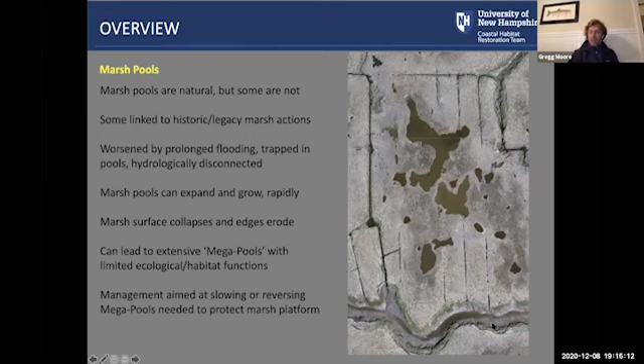This can worsen over time, and pools, particularly ones that are associated with anthropogenic or man-made impacts on the marsh, tend to increase dramatically. And I have some footage of that for you guys. So as the marsh system begins to collapse, erosion becomes more prevalent, the pools deepen, and the problem kind of accelerates, and smaller pools merge into what's called a mega pool, which is really just a series of large pools that coalesce over time. And we're seeing that more and more frequently. So management actions that are aimed at slowing or reversing mega pool formation are really needed in today's situation of sea level rise.

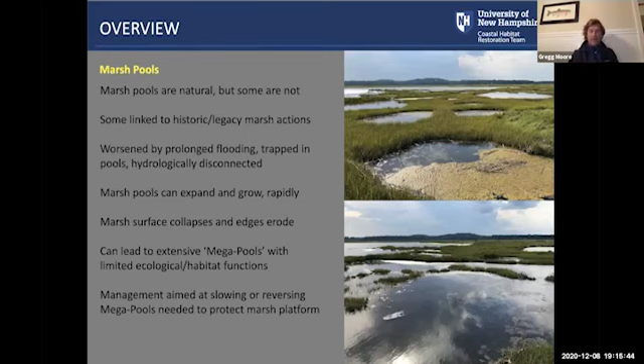And is this lagging? I hope not, because it's video. Is it all right? It's a little choppy, but it's okay.

So runnels are not new, although it seems to be back in the common parlance, but this is an active practice of mosquito control. The shape and length and how they're constructed differ widely, but all of them have similar goals. Let's reduce or reverse pool enlargement, improve tidal exchange, improve water quality in the pools, reconnect hydrology, increase habitat heterogeneity, really just make the system better, but really slow the expansion of the pools. And ultimately, you put all those together and you're building marsh resilience, which is critical these days.

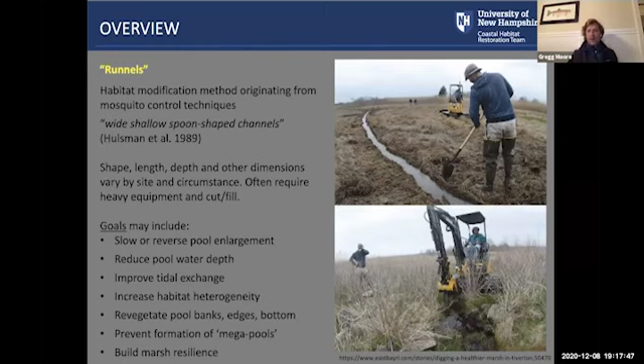The current runnels will be shallower but wider. So they'll have a shallower profile but a wider cross-sectional area. They'll be 8 to 20 inches wide, no more than 4 to 6 inches deep. And you'll see from our selection of the sites that they will not exceed 10 feet in linear length. This is not an approach suitable for every pool management scenario, but it is a technique that was designed specifically for pools that had nearby connections that we could achieve management goals, particularly in places that are remote and where mobilization, demobilization of heavy equipment is difficult or would cause unnecessary alteration or damage. Again, there's no cut, there's no fill.

This is compaction. We joke that if we had a class of fifth graders come through on an educational field trip, they might create a runnel just by their feet walking to the site. So the level of impact is minimal. And because we're selecting areas very close to tidal creeks that are already impacted by some form of marsh collapse, they compress very easily.

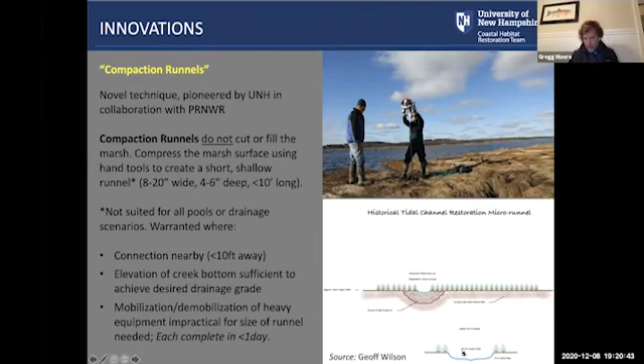I apologize for how small the figure is, but the dimensions there are showing 8 to 20 inches in width and 4 to 6 inches in depth. All right, so this is 30 seconds of a candidate site for one of our runnels that are proposed. There's Dave Burdick, who was about to install a water level recorder that day. This was earlier in the summer while we were checking hydrology and doing RTK elevation surveys.

All right, so the benefits of compaction runnels particularly is that it minimizes the impact to the marsh. It does not result in destabilization of the edges. We like them particularly because they don't result in sediment loss from the pool. We want to make this as gradual as possible so that you don't have erosion scouring from the pool itself.

The design of this will be spec'd for no less than 80% of drainage during an ebb tide. So there's going to be a serious amount of exchange created, which is central to the goal. And it's well suited for adaptive management because it's so low impact and low key. It can be widened if the goals have not been met.

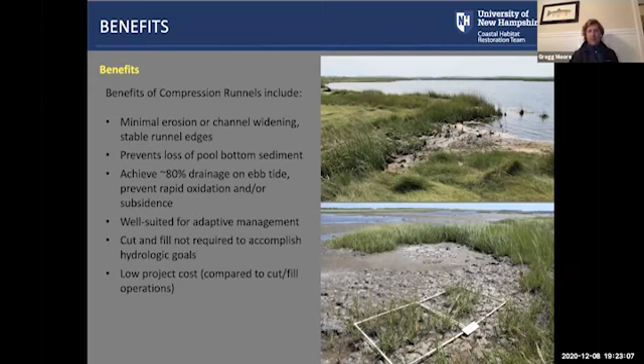It doesn't require cut or fill to accomplish, and it's very much minimizing the costs of the equipment and mobilization that typical runnel projects involve. It's just another beast entirely. And I am well aware of the other runnel project being proposed, and it's going to be a fantastic project with lots of great innovations in it. But these are very different in their scope and their methodologies.

So what have we done to date? Over the last year and a half, we've met with our project team on site when we could all get together and be together in the field. Luckily, we got that sorted out. We've had a number of field site visits to winnow down our list of possible pools to the ones that are the simplest and the shortest run and the ones that we're most confident of success.

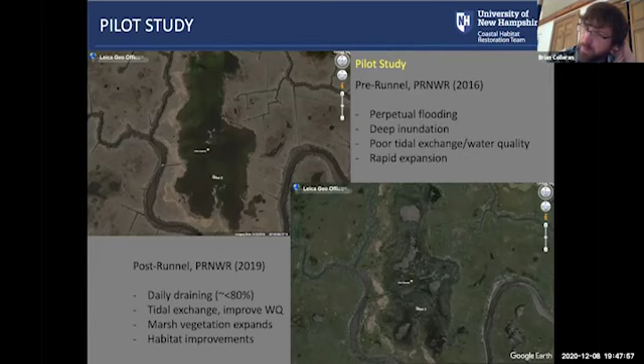If I went back a slide or two, this slide right here. Right, Greg, you're okay? I'm following you. My concern has more to do with the lifespan of the runnel. Because if you succeed with the pool, then at a certain point, the pool is going to be at grade or taller than your runnel, and so then your runnel just becomes like a slope. Now I understand. Yeah.

And to that, right at the leading edge of the runnel of the pool, and just out on the downspout of it, if you will, there tends to be a scour from the force of water coming in and out of that bottleneck. So that's what keeps that open. But yes, in a perfect world that I don't think we'll achieve in 3 to 5 or 10 years, that pool could accumulate sediment and build its way up.

But based on the rates of sediment accretion in the marsh, that's the long haul. In the time frame that we're talking, you won't see that pool heal itself vertically, but you may see it heal itself laterally, as in closing in and becoming smaller in its total area.

Okay. I promise I'm getting near the end of the questions. Well, I'm happy to answer them all.

The pilot project and the natural blowouts that you referred to, with the changing climate as a background and the changing water level as a background, why do you need a control? Arguably a control is for replication, so that people could do the same thing later. And there won't be the same thing later because waters will move and the temperature will rise and CO2 fluctuates, blah, blah, blah. You've sort of got a natural example of what will happen and your pilot. So what role are the controls playing?

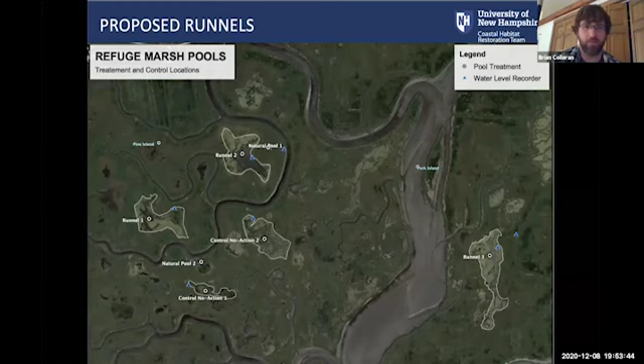Well, I think I should probably stop since I think Kevin, Peter, and Dan are having more trouble listening to me than they had listening to your presentation. But I'm just happy to be in a Zoom call where people answer any questions. Yeah, I could poke around on this all day. This is right up my alley. Bill Holt, what's on your mind?

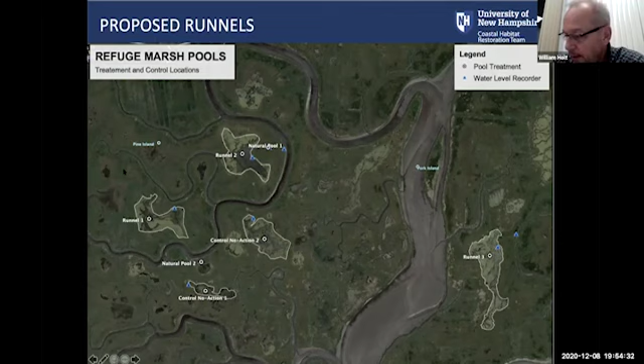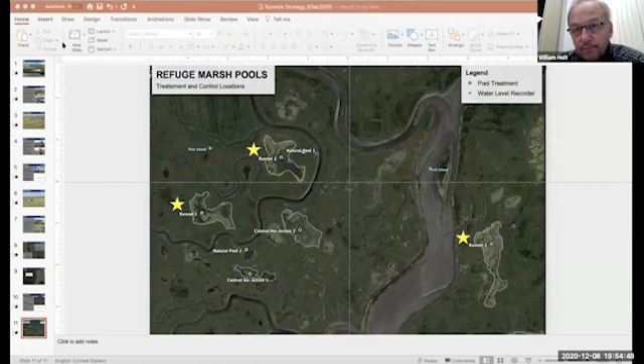Okay. Well, I don't really have any technical questions. I kind of understand what's going on, but it's not my expertise either. But I have some procedural questions that we should probably address. You brought up the RDA versus a notice of intent. I spoke with Alicia from DEP, asking her the same question. And the response I got was that the RDA that was done in 2016, the DEP had missed the boat on that one. They should have probably appealed it, and they didn't.

Either due to workload or it slipped by the wayside. So my gut feeling is that if we issue a negative determination, even as a -3 with conditions, and I was thinking of the conditions that we might impose on that, the DEP still might appeal it, and that opens up a whole different set of guidelines for the applicant.

At that point, it becomes a state permit, and they would likely have to have a MEPA review, which involves an ENF or an EIR filing with MEPA. The timelines for a DEP appeal and a MEPA review are probably going to set them back quite a bit of time. So I'm not sure if we'd be doing a disservice by giving them a negative determination.

But then I'm thinking to myself, well, if we give them a positive determination, we make them file a notice of intent with us, they'd be back probably in January with basically the same application, I would imagine. The information seems relatively complete.

The amount of work per runnel is 10 linear feet, 8 to 20 inches wide and 4 to 6 inches deep. My quick calculations are 7 to 16 square feet or 6 to 9 cubic feet of disturbance, which seems a little bit de minimis to me. It's a very small work area done by hand tools, no equipment coming out to the site, accessed by water. So I think the work could be done with very little impact to the marsh.

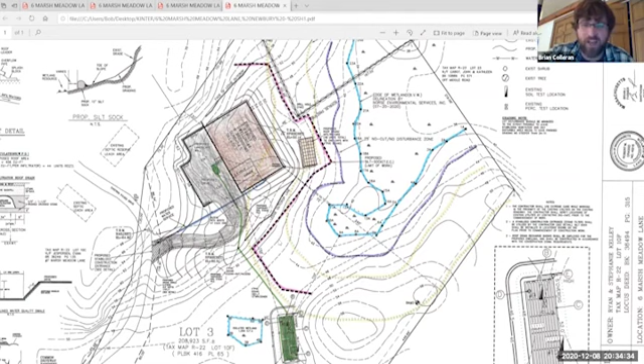Scrubbing the tires or washing the tires or any of that stuff, or if they can use downed logs and, I don't know, balance beams across. I appreciate the sentiment. I believe that's out of our jurisdiction. Yes, but we can also ask nicely. But you're right about the condition part. Yeah, that would not be a valid condition. I overran there a little bit. Anyway, whatever. You get the idea, Bob.

Can we make it a condition that the erosion control barrier would serve as the limit of work and that it be marked in the field according to a plan that the applicant provides, prior to issuance of a certificate of compliance or something, so that they have some options about how they want to mark that? I know that they didn't necessarily want to have a fence, and there are lots of different ways of doing it, but I think if they present a plan that just identifies that limit of work somehow in the field that prevents future encroachment, we can give them some flexibility in how to do that.

So this is like a long-term thing, like me forever. And there's very likely never going to be someone else until 80 plus years from now. And I would very strongly not want to put any demarcation, any fence, any signage, anything. The beauty of the land and having that fade into the wetland is the beauty, and I would hate to detract from that in any way. So then we'll just have to ensure that when a certificate of compliance is issued, that limit of work has been respected. That would be your burden. Okay. Yeah, absolutely.

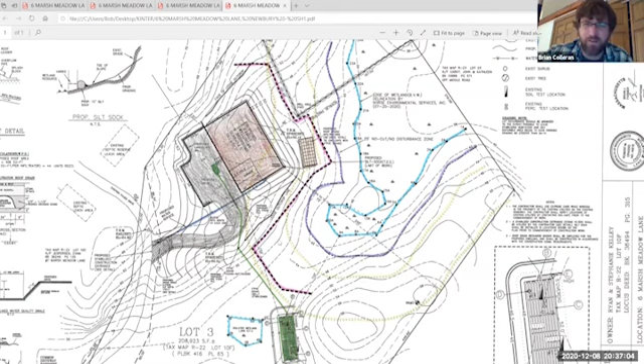Mary, help me out here. I'm just thinking about Kevin's comment about jurisdictional stuff, because if we're dealing with invasives in a non-wetland space on a project site, where's that fall? I forget. That's a hazy gray area in my mind right now. I'm not sure what the question is. I mean, you could only regulate the portion of the property that's within 100 feet of the wetland. Right, but if we're regulating the work, does that give us? No. It's the 100 feet.

If you have something that you want to add about landscape plantings not including invasive species, we can do that. The portion of the landscaping that's in the buffer zone would not include any non-native species or invasive species. Right. And we usually do that, but that's not necessarily within the buffer space. It's not necessarily fully jurisdictional either. But no, it can only apply to the buffer zone. You can't apply it to other areas of the site.

All right. Well, let's keep moving, just because we're getting... at least I'm starting to get... Yeah, it's a long night.

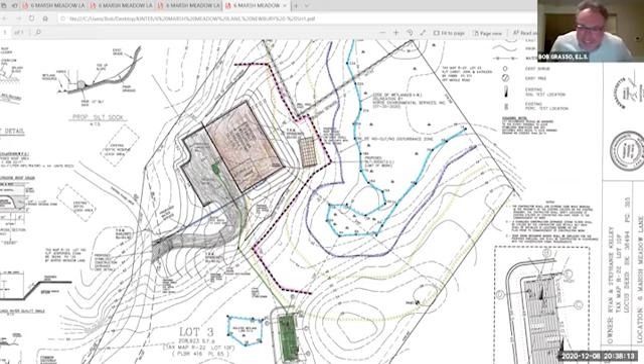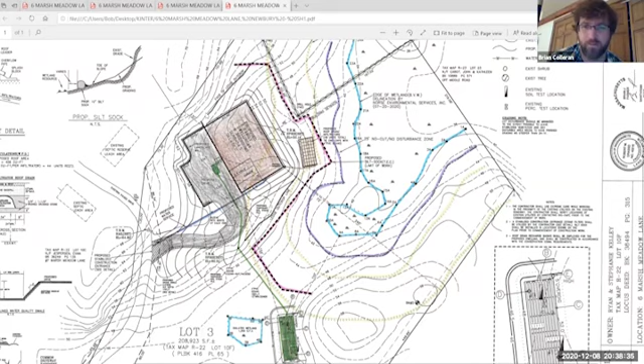So I would make a motion, if it's appropriate, to approve the plan and issue an order of conditions subject to the conditions that were previously stated. Seconded. Excellent. All right. Roll call. Bill Holt. Good. Daniel. Yes. Kevin. Yes. Mary. Yes. And Peter. Yes. And I will also vote in the affirmative.

All right. Thank you, Bob. Thank you very much, Ryan. Thank you, everybody, for your time. I really appreciate it. Good luck. Thank you.

All right, so next up we have Kevin Whitney of KNR Construction Company, LLC at 84 Boston Road, DEP number 050-1337. A continued NOI to construct a 7,400 square foot building with 2 paved access driveways, paved parking, and access on 3 sides of the building, and a gravel storage area to the rear and side of the building. All right, so who's here for these guys? Chris, is this you? I'm here. Yep, Chris York from Millennium Engineering.

All right. I have my desktop computer here too. If I can have that as the co-host, I can share the screen, share the plans. Can someone... I have the desktop computer as well as my iPad. I'm using the desktop, if I can use that to share. So, Bill, is that Gretchen at the Chris York desktop? Yep, that's the one. I don't know if she's still here.

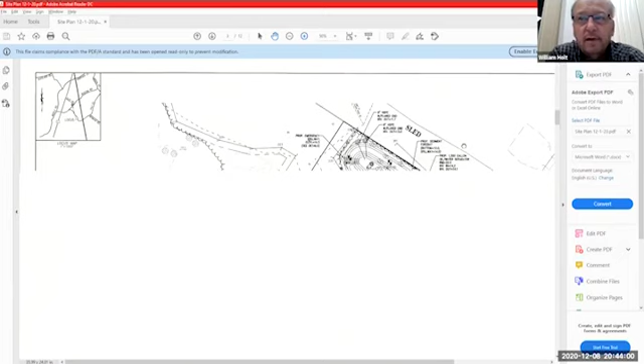And it basically says that there's a total buffer disturbance impact of 59,000 square feet. It works out to be about 60% of the lot area. From 0 to 50, they had 23,500 square feet of disturbance in the buffer, which is about 40% of the total disturbance. And from 50 to 100 is 35,500, which is about 60% of the total disturbance. I think Ben had asked for that summary, which they did add to the plans.

I know one of Joe's comments was access to the constructed wetlands, and on the northeast side of the property, there's a way to actually get down past the wall and get into the constructed wetland areas to maintain it. I don't know if that should be an easement, or I assume this will be maintained by the owner, but I'm not sure if the town would like an easement on that or not. You'd ask the planning board. The town needs an easement to be able to access it in case it needs to go in there for anything.

I noticed the wall on the northeast side of the property along Boston Road has been eliminated. I think they did some regrading, some plantings up there, and the proposed wall was no longer shown. I think Joe had a comment about that on the grading, I believe. Yeah, I took a look at that a little more. The wall wasn't needed because this ledge outcrop is going to come out and it'll be much lower over here than it is now. So this wall wasn't needed.

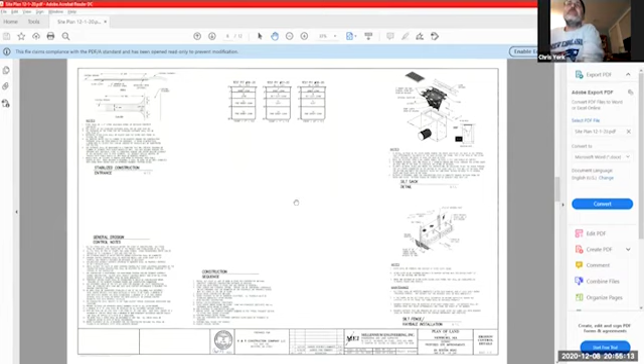Yeah, so as part of the construction of the wall, we'll probably lose some of the natural buffer. So I think that's why someone, I don't know who it was, had recommended some additional buffer to kind of put back in what we take out ultimately. I can show a detail of the wall. It's just a typical Shea concrete type of block wall. So each step of the wall is about 24-inch wide, 24-inch deep stones. So there's probably a little bit of a lean to it. It should be pretty straight, but there'll be a little bit of a lean to it.

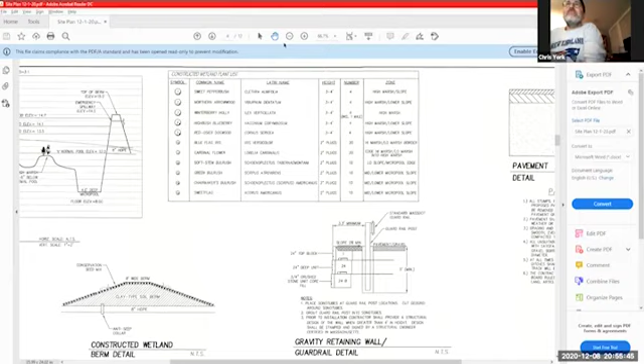So we got about 15 to 20 feet of buffer right now proposed. The symbol itself is about the width of what the wall would be. So the wall would be about 12 to 15 feet away from the edge of the wetlands. So we showed a proposed tree line that's kind of right up against the wetlands. That's why we're showing the new buffer plantings in there to help mitigate what we take out. I hope that kind of answers your question.

Well, it kind of does, but it's a big wall too. Yeah, it's 10 foot high. It's 10 foot high above grade. Yeah. So it's going to be dark back there. There's not going to be much sunlight. The shading will probably even go into the wetland. Yeah, that's a good point, Dan. It's a good observation.

To keep on this topic, Chris, so the wall is functionally a retaining wall, right? It's holding up the hillside that they're building on top of, right? Yeah. Yep. Okay, and so is there a version of this where the hillside doesn't need the wall? How structurally functional is this versus how much of an insurance policy and slightly decorative in a sense? No, I'd say this wall is definitely more for structural purposes than decorative purposes. Okay. Like I said, it's a big wall up there. Okay. And then we could try and grade it a little bit and make the wall a little smaller.

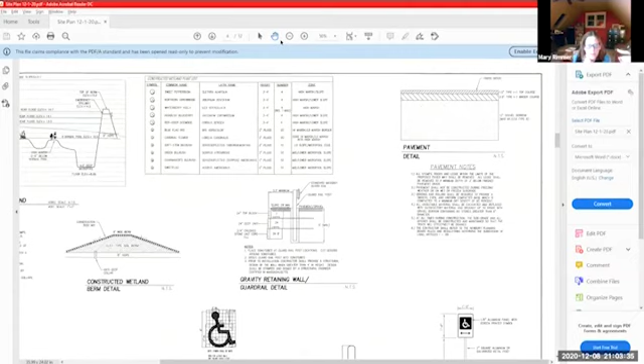And then on the constructed wetland itself, I just had a question about the cross section. You use the expected water elevation at 12, which is the existing grade at that location. So I'm not sure where that's coming from. There you are. I think it says the pool elevation is 12. Yep.

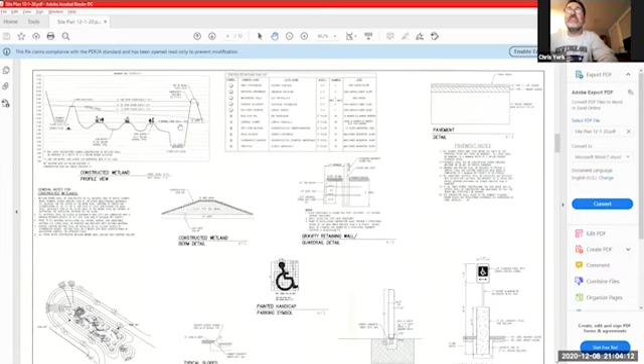So that is the grade presently, the existing conditions at the basin. So I would have expected that you're intercepting a groundwater table that would be lower than 12. Yeah, we'll be intercepting the groundwater table with the swale that kind of runs through the middle of it. The micro pool will be several feet into the swale. So that is the swale going through the middle of it. But yeah, it's these kind of

dips, the swale. So I'm trying to see what the elevation is of the wetland itself near there. It looks like it's around 12. Okay, so around 12, 13. So there's a 12 contour that runs right through there. Okay, here. And then obviously it gets higher up here. So your water elevation might actually be lower than what you're showing there.

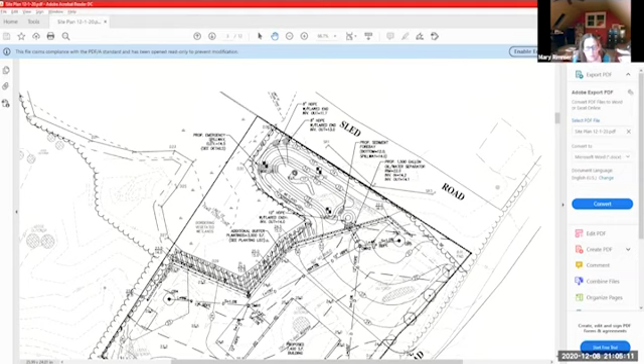So my main point is the proximity of the work to the wetland is obviously the biggest concern, and then whether or not that extent of clearing is required for the project if only a couple of people are going to be needing to park there. I know you need to turn vehicles around and you need space for that, but is the clearing the minimum necessary to accomplish that? Well, they'll also be storing some of their equipment on site, so that's what that's for. More than just the workers on site. There'll be areas just for storing vehicles overnight.

Will there be loose storage of unconsolidated material like loam or stone or sand or anything like that on site? Nope. According to them, nope. Just vehicles and some of their larger backhoes and whatnot that aren't in use. So no fill or anything like that going to be stockpiled? No stone, no fill, no stockpiled areas. Nope. Okay.

And where's this with the planning board? Has it been reviewed? Is it being reviewed? We were there last week for the first time, so we'll be back again in January. And are we expecting additional comments from Joe Sirwatka? Is he going to be issuing a final report on this? I expect we'll get a second letter from him. I would assume that 95% of the comments are addressed. There'll probably be a couple little odds and ends hanging around, but we'll get a second letter from him in the coming weeks. So it sounds like we're looking towards a continuance on this with some additional information needed. Yeah, probably.

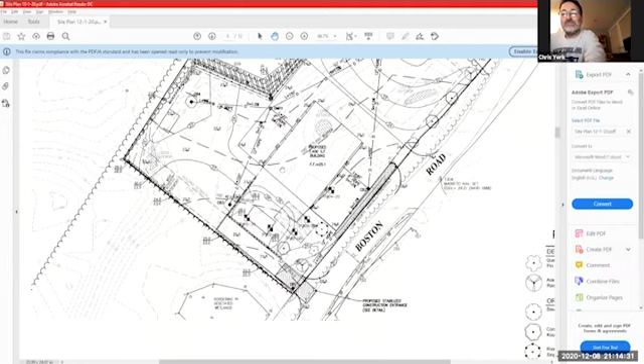So the site plan we submitted to the planning board shows turning movements for the trucks. So a big truck comes in and has to kind of turn around and then back into the building. So it takes up a good amount of space out here. That's why there's so much area out here that's being disturbed. But I can also find out what the intent is over here in terms of storage of vehicles or whatnot too.

Yeah, that would be helpful. And, certainly for me, hopefully for other people too, but at least for me, it would be helpful. All right. So, anybody else on this?

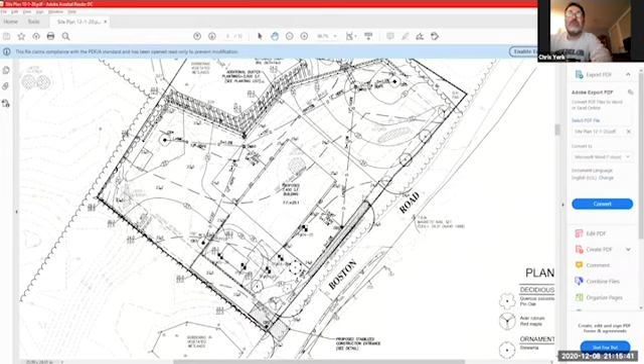Do we know if this is going to be lit at night? It will. That was one of the concerns that came up with the planning board last week. The plan we show right now shows building lights, and then we also showed some pole lights out in the parking in the storage area. But we're going to ultimately, I think, get rid of the lights out in the gravel area. Just kind of stick with lights on the building.

Because once it gets dark, they're not out there. They're not going to be out there working it after dark, so they don't need a whole lot of light out there. The wall mounted lights will do the trick, I believe, to kind of keep the site lighted enough, but not too much.

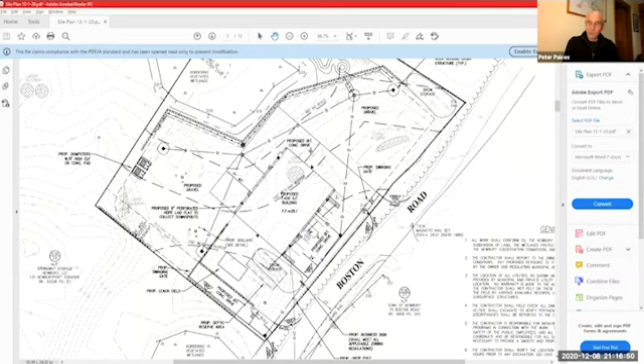So Mary, if I could, through the chair, we have a real big concern with lighting. Since the project contiguous to it has continued and an easement access road was recently created, if you're on Boston Road at night, you can see right down to Route 1 and it's well lit. And you can be on the marsh on the other side of where the hay is and you'll still see the light. So lighting is now kind of a big priority for us because it's gone haywire.

Okay, thanks. Glad to hear that. With all of the migratory creatures that come through at night, that's obviously a big deal.

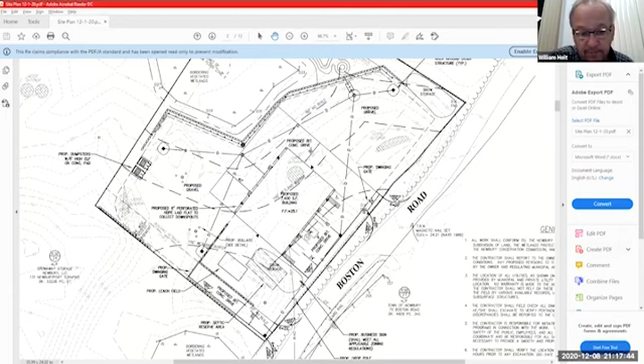What about the neighbors? Yes, has some of the clearing that's already occurred on this lot been within the buffer zone? It's between. Yeah, it is in the front on Boston Road because they didn't show that off-site wetlands before, and when I authorized them to do the access road, that buffer was not there. So unfortunately, they did. So they're in violation now. Okay.

I just lost my screen. Am I still on? Yes. Oh, okay.

Hey, did you guys hear from the school next door? That's Essex County Greenbelt that owns that property. Well, Greenbelt has it, and what is it? Is that Merrowhawk that uses it? It's the boat school. I forgot the name of it. Yes, they use the property for outdoor education purposes, but Essex County Greenbelt is the landowner. Yeah, I know this, because that's my husband.

Yeah, that's something that's on my mind. I would really like to make an effort to make sure that we don't surprise them with anything in this regard, because if you're sending your kids to a nature school and having something like this right next door, it would be throwing their business model under the bus, so to speak. Okay. Well, they would have been notified as an abutter of the project. So Greenbelt would have been, right? Not the school. Right, not the school.

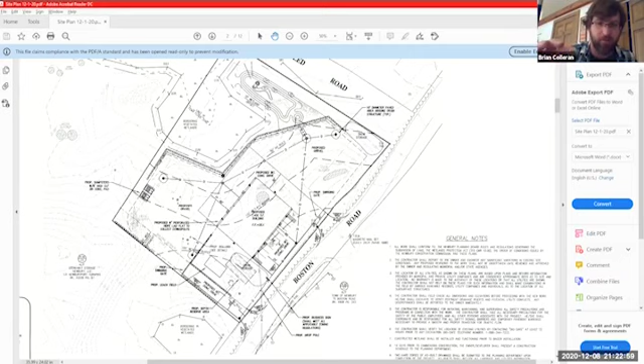Okay. Next items will be quick. I'm just pulling it up. Next item is... I had it up, but... You want me to read what it is? Yeah, go ahead, Bill.

David Mantee, 0 Pine Island Road, DEP number 050-1330, a continued notice of intent to construct the dock, pier, ramp, and floating dock within Salt Marsh Resource Area in ACEC. I was in contact with Mr. Mantee earlier this week, and he has requested a continuance until the January 26th meeting. He will not be ready for the 5th, so they wanted to continue it to the second meeting in January. What is the date for the second meeting in January? January 26th. Okay.

I'll entertain a motion to extend to the January 26th meeting. So moved. Second. All right, second from Peter. Let's see, Bill Lord. Got a thumbs up from Bill Lord. Dan Streeter? Yes. Peter? Yes. And that is a yes from me. Oh, Mary? Yes. All right, that's a quorum. So moved to the January 26th meeting.